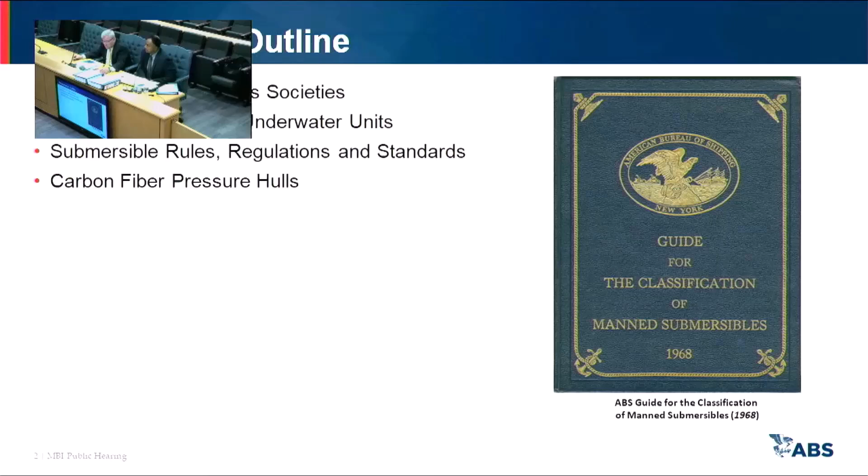I have a presentation which covers pressure hull requirements for passenger submersibles. This presentation basically looks at classification and class societies. We look at the ABS experience with underwater units, briefly look at the submersible rules, regulations, and standards, and also address a few questions on carbon fiber pressure hulls.

Okay, so what are class societies?

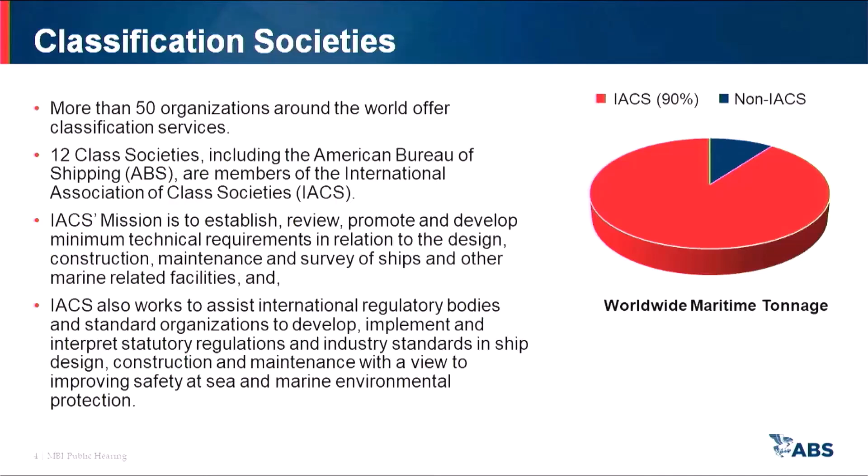Class societies are organizations that publish rules for the classification of ships, offshore facilities, and other marine vehicles such as submersibles. They conduct design review and surveys to check for compliance with the rules, and they issue class certificates and maintain a register or database of ships, offshore facilities, and other marine vehicles that the society has classed.

At present, there are more than 50 organizations around the world that offer classification services. Out of these 50, 12 class societies, including the American Bureau of Shipping, are members of the International Association of Class Societies, or IACS.

IACS's mission is to develop minimum technical requirements for the design, construction, maintenance, and survey of ships and marine-related facilities. IACS also works to assist international regulatory bodies such as the International Maritime Organization and standards organizations to develop and interpret statutory regulations and industry standards.

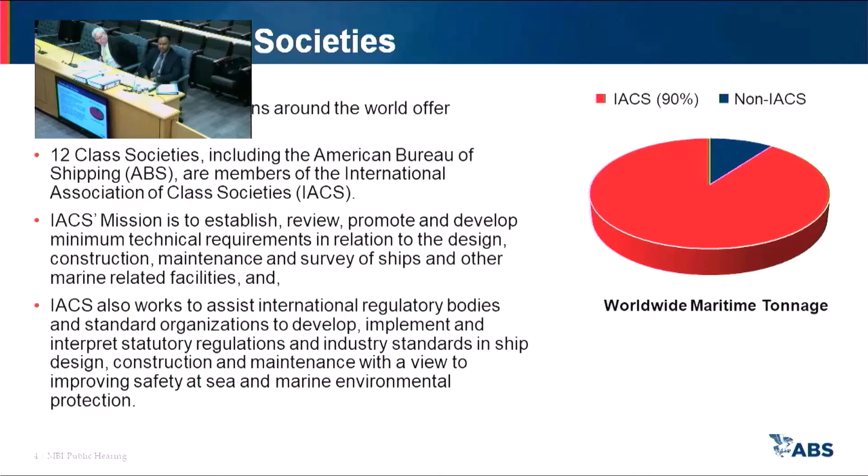IACS member societies are typically well-established class societies that are recognized by flag administrations around the world. At present, IACS member societies are responsible for classing around 90% of the world's maritime tonnage.

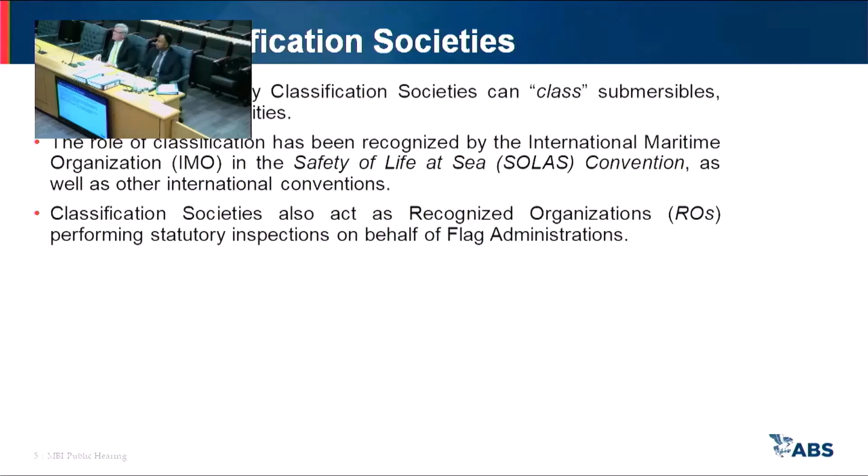In most countries, by law, only classification societies can class submersibles, ships, and offshore facilities. The role of classification has been recognized by the International Maritime Organization, or IMO, in the Safety of Life at Sea Convention, as well as other international conventions. Class societies act as recognized organizations, performing statutory inspections, as well as design review on behalf of flag administrations.

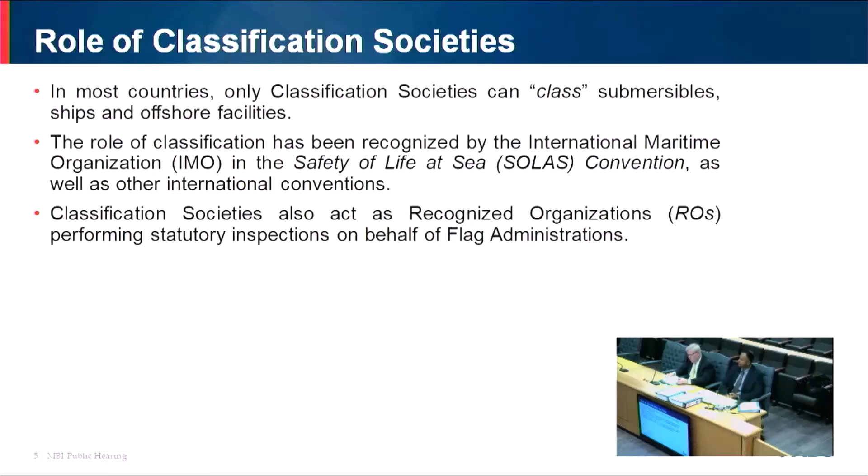The classification process consists of a number of steps which are described in Part 1A of the ABS Rules for Conditions of Classification. So what are these steps?

The first step involves the development of rules, guides, and other standards for ships, offshore facilities, and marine vehicles such as submersibles. The next step involves design review and surveys to check for compliance with the rules. Then classification of ships, offshore facilities, and submersibles occurs once compliance with the rules has been checked. Finally, a class certificate is issued, valid for 5 years and endorsed annually after conducting post-construction surveys. So how are the class society rules developed?

These rules are developed by class society engineers and surveyors with the assistance of industry experts. The rules are then reviewed and approved by committees that include industry experts, representatives of government organizations, shipbuilders, ship owners, operators, etc. This process ensures that the rules of the class societies are thorough, impartial, and practical to apply.

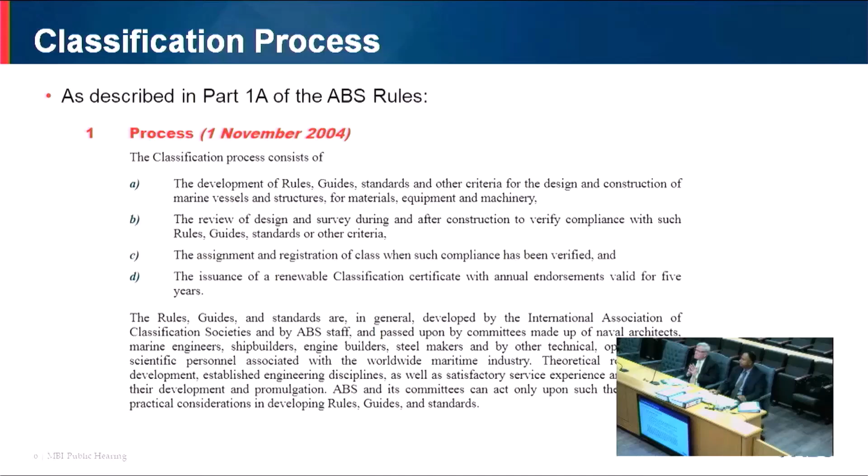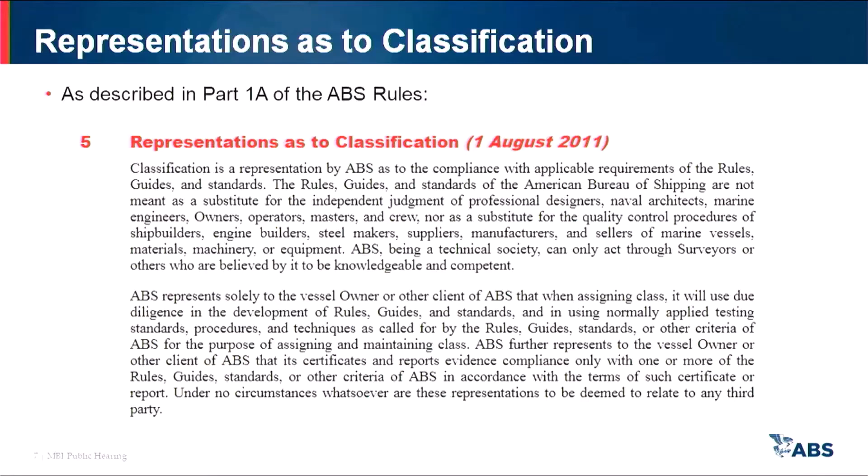Classification in essence means that vessels, offshore facilities, and submersibles are in compliance with the applicable rules. While classification is a process, the owner or operator also has responsibilities. First, they need to operate the submersible within its design or operational limits. All submersibles are designed for specific parameters, and if you exceed these parameters, you're likely to have an accident. So it's very important to operate the submersible within its design and operational limits.

They are also responsible for periodically inspecting and maintaining the submersible, for crewing the submersible with trained and competent personnel, and for following all applicable statutory regulations of the flag or coastal state administration. So all these are responsibilities of the owner and operator.

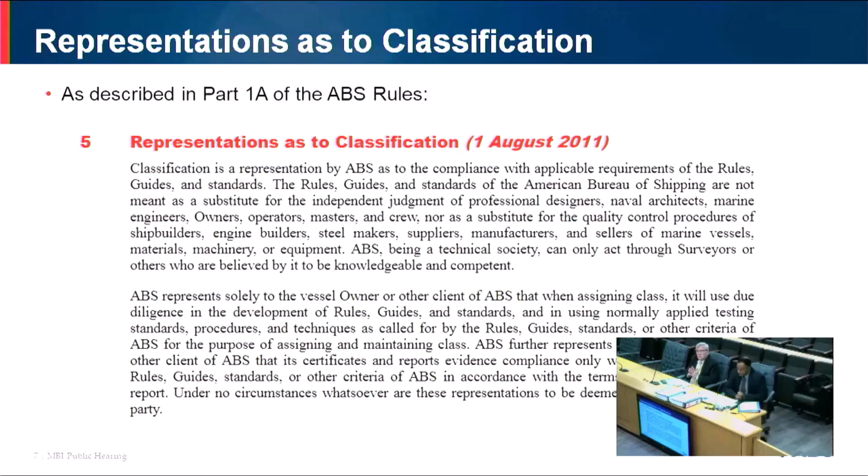The rules provide the minimum criteria for classification. However, owners and operators still need to use independent judgment when they operate the submersible, and safe operation as well as maintenance of the submersible is the sole responsibility of the owner and operator.

So what is the classification process for submersibles? This involves a number of steps. The first step is rule development, meaning we will develop, establish, and maintain recognized technical standards known as the rules. The rules provide the baseline for classification.

Once the rules are developed, the class society will conduct design review to check that the design of the submersible is in compliance with the rules. Then the class society will conduct material and equipment certification, which verifies that the submersible meets the rule requirements and that all materials and equipment are certified and meet the rule requirements.

Next we have new construction survey, which checks that the submersible is built as per the rules. Then we have surveys after construction, which check that the submersible is maintained in compliance with the rules throughout its life cycle. This is done through annual surveys conducted at 1-year intervals and special periodical surveys at 3-year intervals.

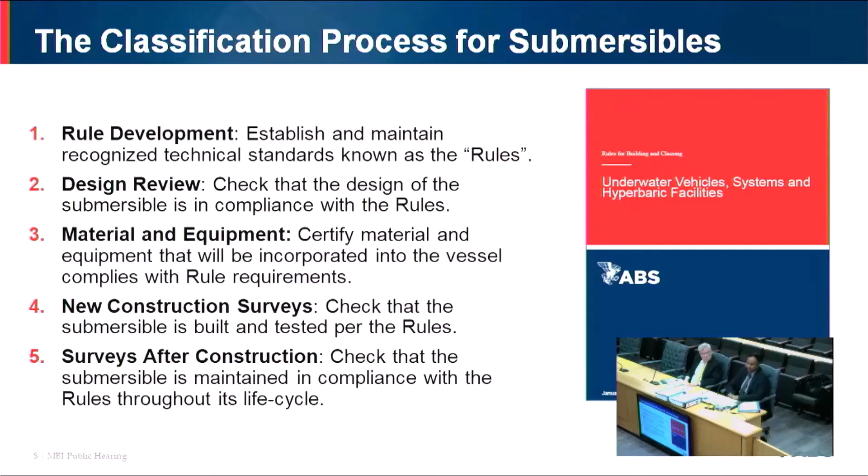This is a little different from surface vessels, which have their special periodical surveys at 5-year intervals. So why do we have a 3-year interval for underwater vehicles? This is because it comes from the IMO submersible guidelines, which require dry docking surveys at 36-month intervals. So this is the basic process for classification of submersibles.

So next we come to the ABS experience with underwater units.

Since the 1960s, ABS has classed around 100 submersibles worldwide. These include some of the first commercial submersibles developed in the 1960s and 70s, such as the Perry and Pisces submersibles. ABS has also classed some of the latest commercial submersible designs available in the market, including submersibles built by companies such as Triton Submarines and SEAmagine Hydrospace. Currently, ABS has around 30 submersibles in class.

Apart from submersibles, ABS also has 43 diving systems in class, including saturation, mixed gas, and air diving systems. We also have one submarine rescue handling system in class for the U.S. Navy, and one undersea habitat in class - the Aquarius habitat, located underwater off the Florida Keys. And then we have 3 hyperbaric facilities in class. So these are all underwater units currently in class with ABS.

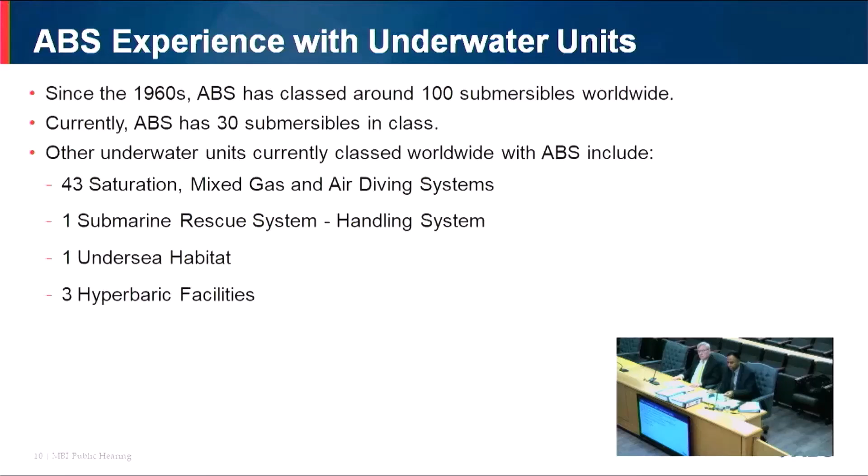When it comes to the OceanGate Titan Submersible, ABS had no involvement with this submersible. No request for class was submitted to ABS, and no design review or surveys were conducted by ABS.

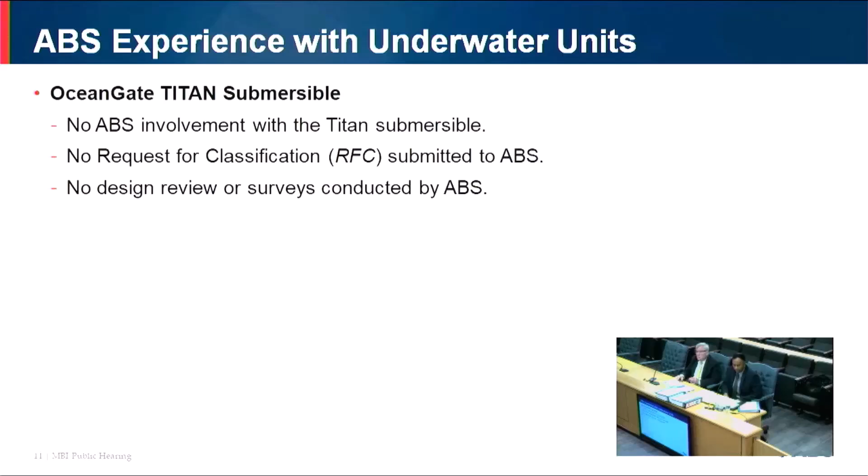The Coast Guard asked us about the Antipodes submersible. This was a submersible that was owned by OceanGate for a period of time, and it was then sold. This slide gives a brief history of the Antipodes submersible.

This submersible was built by Perry Submarine Builders out of Florida, and then major modifications were conducted by Marlin Submarines, a UK-based company. They removed the lockout compartment. The slide basically gives a brief history of this submersible.

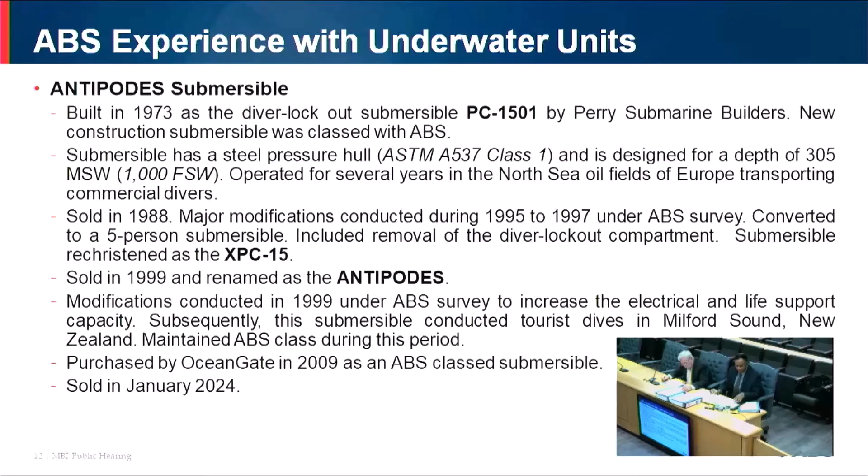The important point is this submersible has a traditional steel pressure hull, and it was designed for a depth of 305 meters seawater, or 1,000 feet seawater. The submersible maintained its classification during the time it was owned by OceanGate, and it is still classed with ABS. That's a brief summary of the Antipodes submersible.

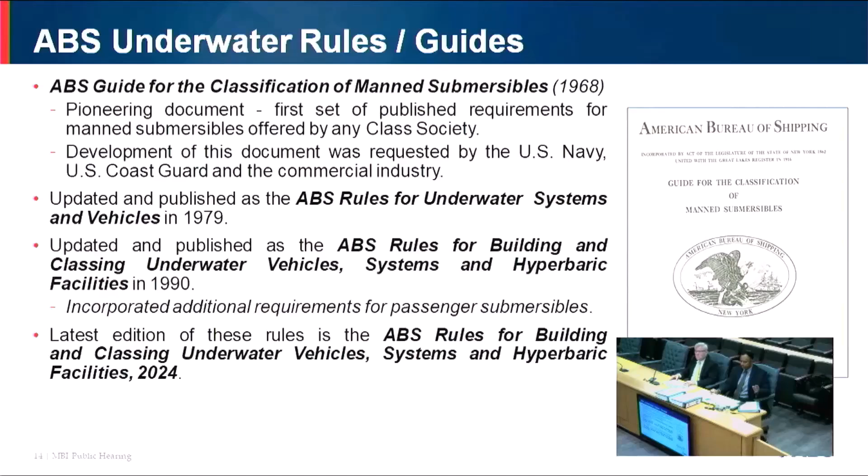Following the release of the 1968 guide, it was updated and published as the ABS Rules for Underwater Systems in 1979. It was again updated and published as the ABS Rules for Building and Classing Underwater Vehicles, Systems, and Hyperbaric Facilities in 1990, which incorporated additional requirements for passenger submersibles. The latest edition is the 2024 Underwater Rules, updated every year and posted on the ABS website, www.eagle.org.

Now we come to the materials. When it comes to submersible design, there are two sets of materials that are very tightly controlled: materials for the pressure hull and materials for life support systems. The pressure hull is a critical component, and it serves to protect the human occupants from the extremely high hydrostatic pressures present at depth. The pressure hull has absolutely no redundancy or backup.

If the pressure hull fails, you've effectively lost the submersible. So it is very important that the pressure hull be fabricated from robust materials that have a documented service history for external pressure applications. The ABS rules require pressure hull materials to be fabricated from approved material specifications, and the rules have a list of approved materials for pressure hulls.

These materials are listed on the screen, and they include steels, aluminum, titanium, and acrylic plastics for the windows. All of these materials have many years of documented service history and are considered to be well-established and robust materials. It's important to note here that carbon fiber composites are not approved materials for the pressure hull of submersibles, as per the ABS rules.

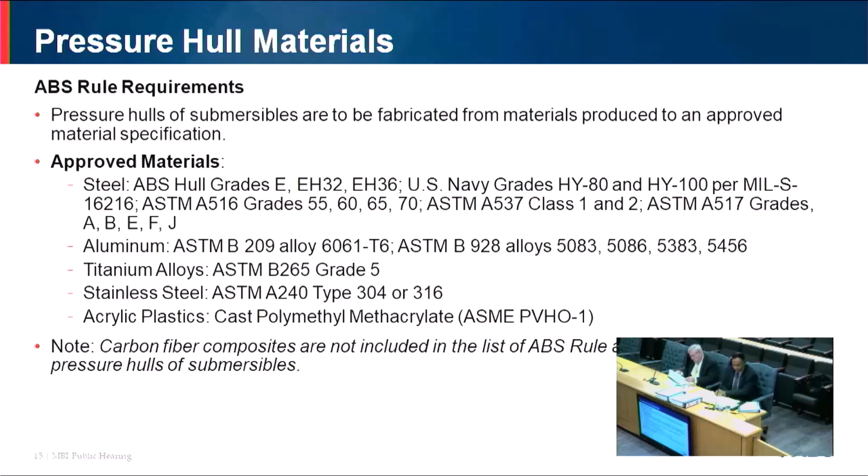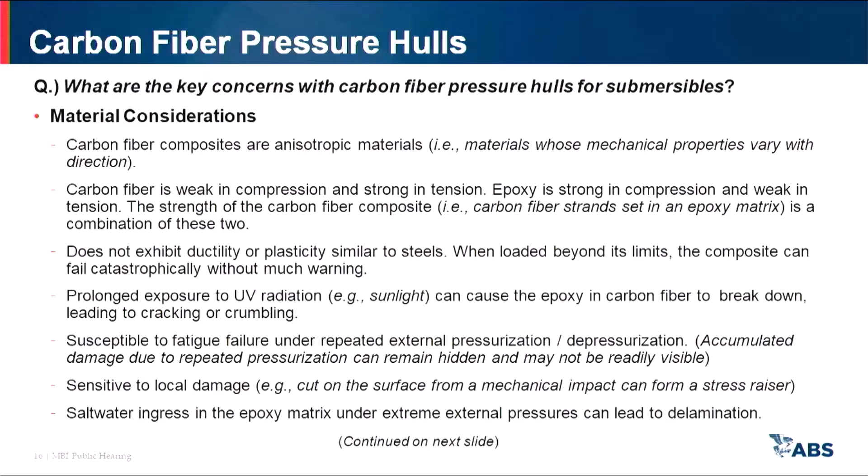So now we have a couple of questions on carbon fiber pressure hulls. So the first question that arises is, why do we need a carbon fiber composite pressure hull? What are we trying to achieve? Okay. So carbon fiber composites are high-strength, lightweight materials. Now, a pressure hull fabricated from carbon fiber composites would be much lighter than a hull made from traditional materials such as steel or titanium.

So with a lighter hull, what happens is you can reduce the amount of syntactic foam that needs to be carried on the submersible to maintain buoyancy. Then you don't need a crane or a launch and recovery system for launching and recovering the submersible while you're at sea. And since the hull is lightweight, you can increase the size of the hull and accommodate more passengers.

So typically what we have seen is anytime you go below a depth of 1,000 meters seawater or 3,280 feet seawater, the shape of the pressure hull is spherical. We have not seen cylindrical pressure hulls being used beyond a depth of 1,000 meters seawater. The reason is a spherical pressure hull is the best shape for resisting external pressure. The stresses are evenly distributed around the hull.

So if you take a spherical pressure hull versus a cylindrical pressure hull of the same thickness, when exposed to the same pressure, you will see that the hoop stress in a spherical pressure hull is half that of a cylindrical pressure hull. So if you see a cylindrical pressure hull being used beyond 1,000 meters, it is pretty unusual. So now, what are some of the key concerns with the carbon fiber composite pressure hulls?

So the first thing is carbon fiber composite pressure hulls are anisotropic. That is, the mechanical properties vary with direction. So the mechanical properties are strongest in the direction of the fibers. When the fibers are loaded in tension, that is when the carbon fiber composite is the strongest. But if you go in other directions, the composite is not so strong.

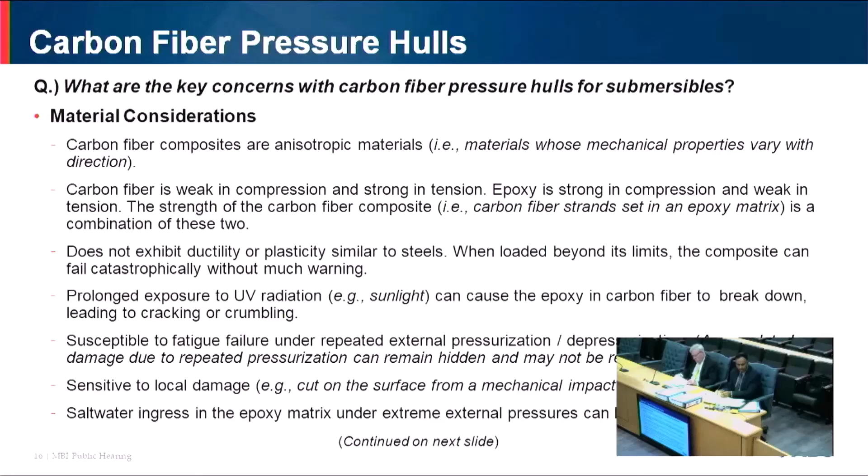So one of the processes used for fabricating carbon fiber composite pressure hulls is the filament winding process, in which the pressure hull is created by impregnating or coating the carbon fiber strands with epoxy and then winding them in a precise geometric fashion over a mandrel. So a mandrel is basically a tool in the shape of a cylinder. So on the cylinder, you wind the carbon fibers which are impregnated with epoxy, and then you cure that cylinder in an oven at 1 atmosphere or in an autoclave under pressure.

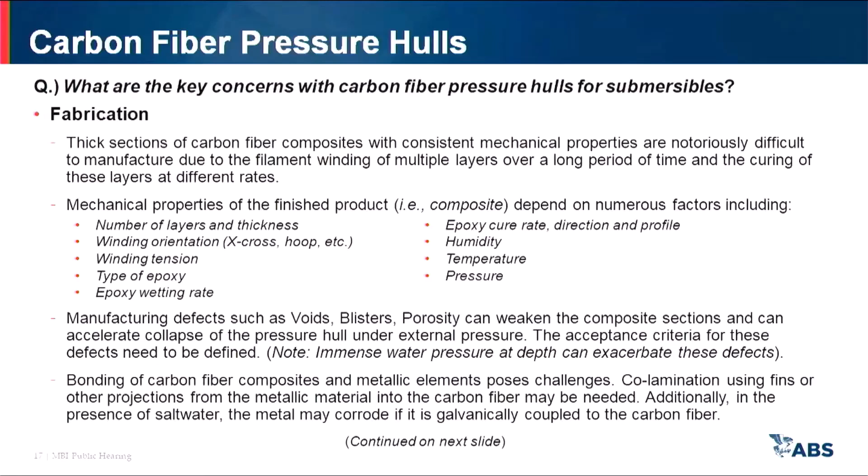So in a thick carbon fiber pressure hull, there may be several layers of carbon fiber composites, and these layers cure at different rates. So what you'll have is several layers with different mechanical properties since they were cured at different rates at different times. So manufacturing a thick section of carbon fiber composites with consistent mechanical properties throughout the thickness is difficult. So the mechanical properties of the finished carbon fiber pressure hull depend on a number of factors. These include the number of layers and the thickness of the carbon fiber composites. The more the number of layers and the greater the thickness, the more difficult it is to achieve a pressure hull with consistent mechanical properties throughout the thickness.

Another important consideration is the winding orientation. Now, a typical thick shell pressure hull is exposed to hoop stresses, radial stresses, as well as longitudinal stresses. Now, if your winding is hoop winding, that means if you wind the carbon fiber composites around the cylinder in a hoop fashion, that is only good for withstanding hoop stresses. It cannot withstand radial or longitudinal stresses. So to withstand radial or longitudinal stresses, you typically employ X cross winding. That means you wind it in an X pattern, and that is more effective in handling hoop as well as radial as well as longitudinal stresses.

Then the type of epoxy resin that is used for creating the composite has an impact on the strength of the pressure hull. So aerospace grade epoxies may not be suitable for high pressure underwater applications. Then there are other factors such as the epoxy wetting rate. That means how much epoxy can you coat on the carbon fiber strands. Then the epoxy curing rate. If you don't follow the correct curing profile, your mechanical strength may differ. Then humidity is another important consideration. High humidity during curing of the composite can negatively impact the mechanical properties. This is because moisture absorption in the resin can lead to delamination and reduced interfacial strength between the carbon fiber and resin, thus weakening the composite.

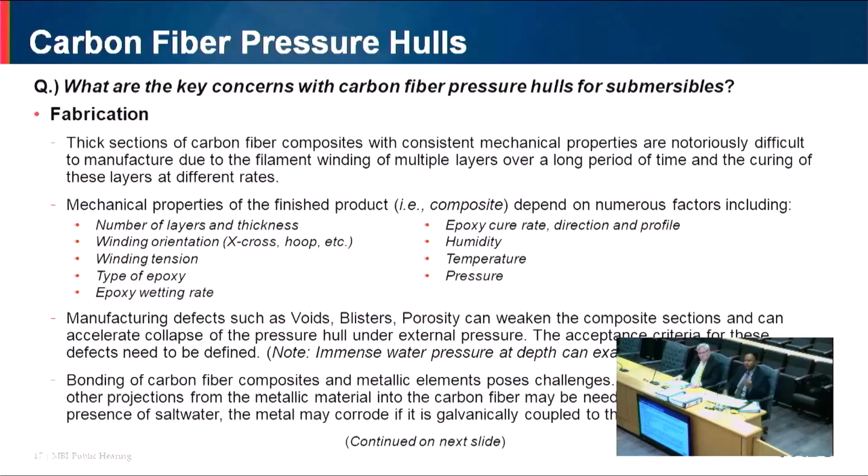Now, galvanic corrosion is an important consideration here because if the metal comes in contact with the carbon fiber strands in the presence of seawater, you can have galvanic corrosion. So this typically occurs in steels and aluminum, and that can cause corrosion of the metallic members. Okay. Next slide, please.

So now carbon fiber composites have a low modulus of elasticity, they have low shear strength, and they are brittle materials with low impact strength, okay? So they have very low resistance to impact loads, and the hull is susceptible to deformation under applied external loading. So typically lifting lugs and other attachments are not directly installed on carbon fiber composite pressure hulls because they cannot withstand localized loading, and they tend to deform under localized loading.

So then if you install penetrations on the carbon fiber composite pressure hull, that means you have to make openings in the pressure hull. That will weaken the pressure hull because the main load-bearing member in a composite are the carbon fiber strands. So if you cut the strands to make an opening, you're going to weaken the pressure hull. So reinforcement of the openings is very critical. And if you don't reinforce it, you can have stress risers in the vicinity of the opening, and that can lead to cracks and failure of the pressure hull, okay?

So then when you design your carbon fiber pressure hull, you also need to consider various failure modes, including delamination, debonding, fiber breakage, and matrix cracking, okay? So delamination basically means separation of the carbon fiber plies. The plies start separating. Then debonding basically means when the carbon fiber strands start coming out from the epoxy matrix, okay? So debonding is caused by failure of adhesion between the strands and the epoxy matrix. And then matrix cracking is basically characterized by cracks in the epoxy matrix, and this occurs due to fatigue of the material. Fiber breakage occurs when the carbon fiber strands will snap or break, okay?

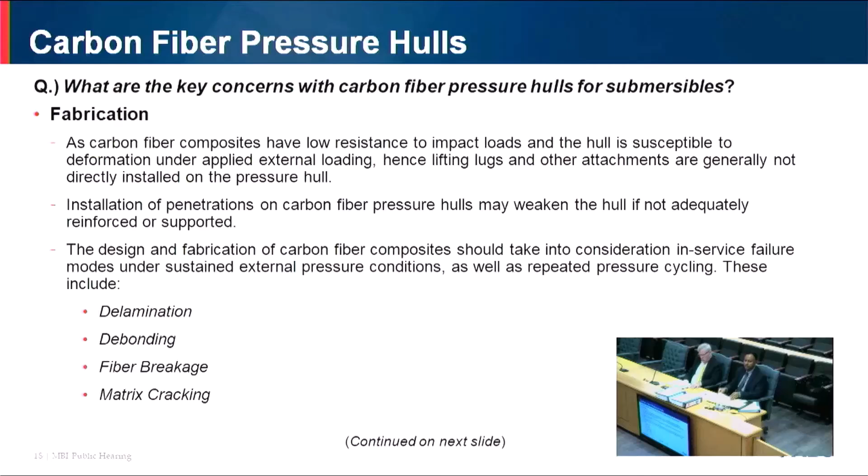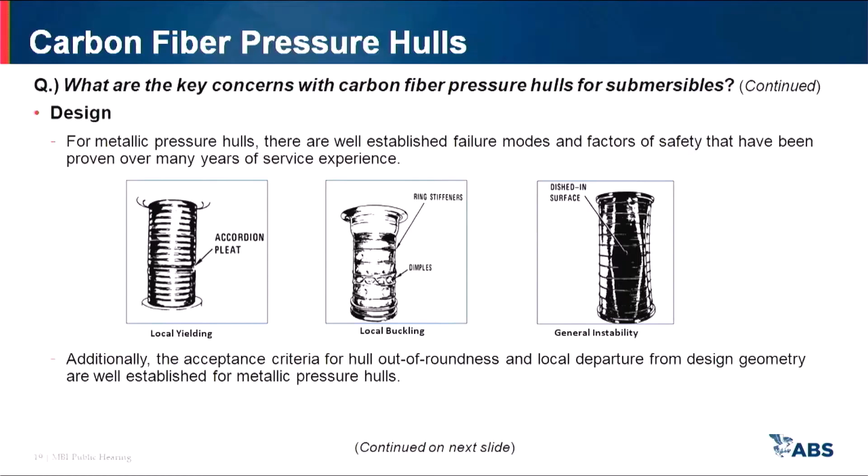So then when it comes to metallic pressure hulls, there are well-established failure modes and factors of safety that have been proven over many years of service experience, okay? So the figures on the screen show some of the typical failure modes for metallic pressure hulls. The first figure shows local yielding. So local yielding occurs when the section of the pressure hull between two adjacent stiffeners fails. Okay, you have yielding between two stiffeners, and then the hull will take the shape of an accordion pleat. So that is called local yielding, and the factor of safety for local yielding in the ABS underwater rules is 1.5.

Then you can have local buckling. Local buckling occurs when the section of the pressure hull between two stiffeners buckles. Okay, so you'll have dimples formed in the pressure hull, and that is known as local buckling or lobar buckling. And the factor of safety for this buckling in the ABS underwater rules is 1.25. And the third failure mode, which is the figure on the far right, is general instability or overall collapse of the shell and stiffener section, okay? And the factor of safety in the underwater rules for this failure mode is 2.0.

So all of these failure modes are well established, they have many years of service experience, and the factors of safety are well proven through service experience on many different submersibles.

Now, additionally, the rules also have a well-established acceptance criteria for hull out of roundness and local departure from design geometry. So when you have a pressure hull which is exposed to external pressure, it is very important to maintain roundness of the hull. So if the out of roundness of the hull goes beyond specifications, it can cause premature collapse of the hull.

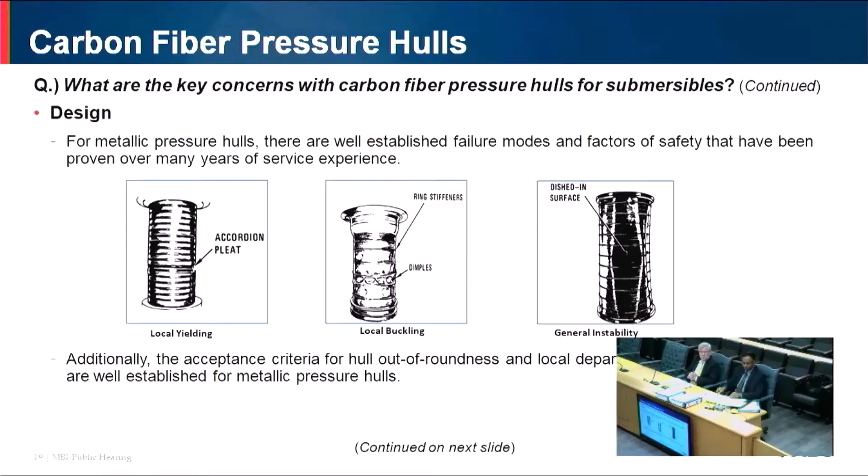Currently there are no recognized national or international standards for carbon fiber pressure hulls for human occupancy. The ASME Boiler and Pressure Vessel Code has Section 10, which addresses fiber reinforced plastic pressure vessels. But if you look at the scope of Section 10, it states that pressure vessels of human occupancy are not covered under this code. We had a look through this code - it addresses pressure vessels that are used for surface applications. It really does not address pressure vessels that are used for deep sea diving applications.

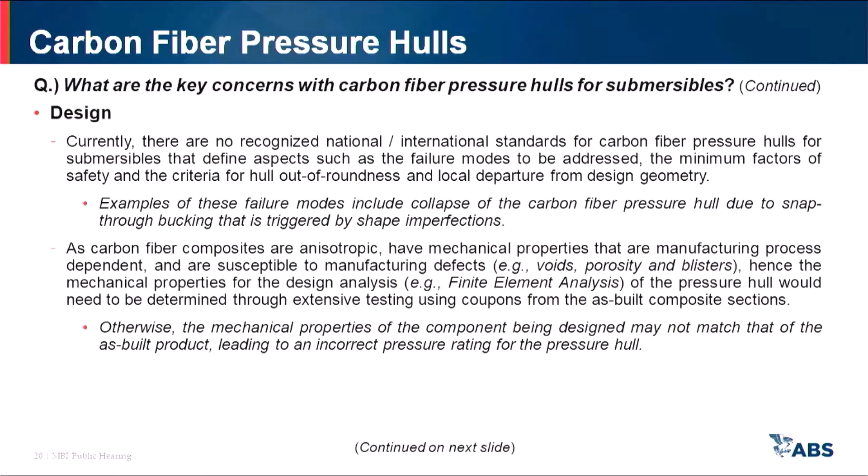We had a look at the testing requirements. Many of the testing requirements are geared towards internally pressurized pressure vessels. We didn't see any specific testing requirements for externally pressurized pressure vessels. So these are some of the shortcomings of Section 10, and this section is not applicable to manned pressure hulls.

Nevertheless, it has a lot of useful information. It has acceptance criteria for voids, delamination, cracking, etc. The important thing is this code states that for a new construction pressure hull, no delamination and no cracking in the matrix is permissible. So if you have a new hull with delamination or cracks, it is not acceptable as per this code.

When it comes to carbon fiber composite pressure hulls, the different failure modes, the factors of safety, as well as the other acceptance criteria is not really defined in international standards, as well as class society rules. So one of the very important failure modes for thick shell carbon fiber composite sections under external pressure is snap-through buckling. Snap-through buckling is an effect that has been observed in subsea pipelines made of glass fiber reinforced plastics.

This buckling causes sudden and catastrophic failure of the pressure hull, and it is thought to be triggered by shape imperfections. For example, if there is out of roundness, that can trigger this buckling.

Snap-through buckling is different from traditional buckling, which is caused by progressive overpressurization of the pressure hull beyond its design depth. When snap-through buckling occurs, it causes instantaneous delamination of the pressure hull and instantaneous collapse, which can occur in less than a millisecond. So if you have sensors for real-time monitoring, it will not pick up any signs of this failure before it occurs. Snap-through buckling is a phenomenon that is not yet well understood.

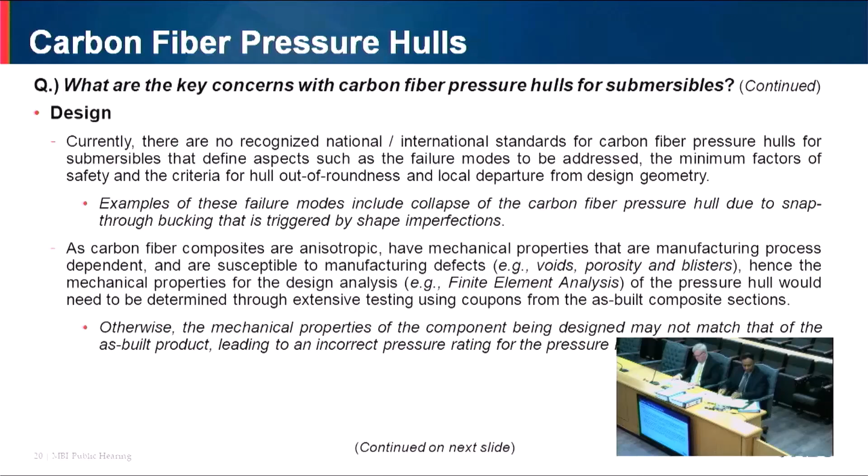So next we come to non-destructive inspection of thick carbon fiber sections. If you have a very thick carbon fiber section, for example a 5-inch thick section, ultrasonic examination may not be suitable because of lack of penetration of the ultrasonic waves and lack of reflection. So using UT, you may not be able to evaluate a thick carbon fiber composite section.

So for thick carbon fiber composite sections, you will use non-destructive techniques such as X-ray computed tomography, or you can use active thermography. With X-ray computed tomography, basically you have an X-ray machine that goes around the circumference of the pressure hull, and you get images in slices. All these images are combined together using software, and you get a 3D image of the hull. Then you have an in-depth look at what is going on inside the hull.

So this inspection basically requires you to strip down the pressure hull. If you have a pressure hull that is in service, and now you need to do a non-destructive examination, you need to remove all the equipment, or all the outfittings on the pressure hull. Now if you do not have this equipment at the facility where you're maintaining the submersible, then you need to ship the submersible hull to another facility where they have this specialized equipment.

Now, after doing the NDI, if repairs are required, you may need to repair the pressure hull, and then ship it back. So all this is an expensive and a long process, and it may not work practically for a submersible that is in operation, because you need to take it out of operation for many months at a time. So these are some of the challenges that you will face if you use a carbon fiber composite pressure hull.

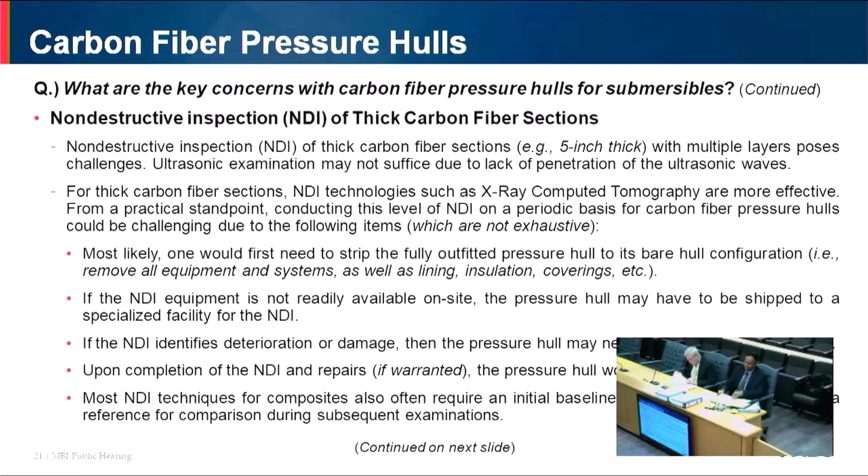So for carbon fiber composite pressure hulls, it is very important to verify that no deformation is taking place, no degradation is taking place, or no flaw development is taking place that may weaken the pressure hull. So this needs to be done periodically over the service life of the pressure hull.

Now, the post-construction inspection and testing criteria for carbon fiber pressure hulls are currently not addressed in recognized international or national standards. As a minimum, they should address non-destructive examination criteria. So what kind of non-destructive examination is required? What is the periodicity, and what is the acceptance and rejection criteria for this examination?

Then what are the dimensional measurement criteria for out of roundness and local departure from design geometry? So how much out of roundness is permissible? This is currently, for a carbon fiber composite pressure hull, not addressed in international standards. And then what are the test dive requirements periodically for carbon fiber pressure hulls? So all of these are not addressed currently and they need to be addressed.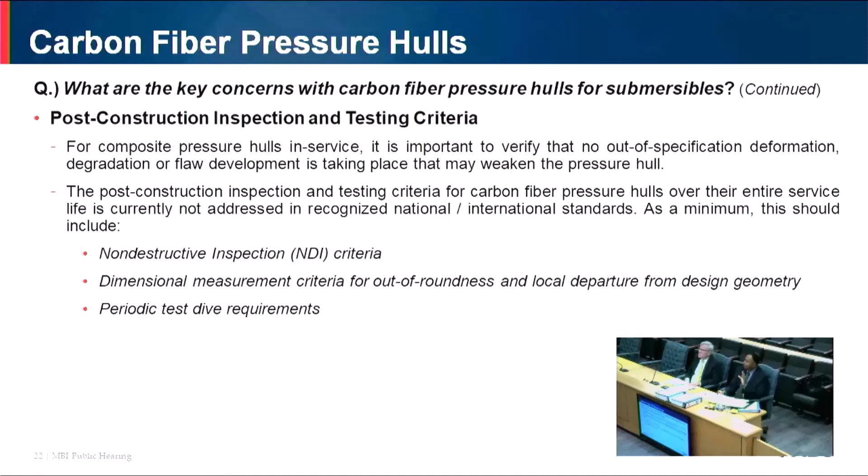So then the question comes up, do existing class society rules, statutory regulations, or industry standards address carbon fiber pressure hulls for submersibles? Under the ABS underwater rules, carbon fiber pressure hulls are not acceptable materials for submersibles. Now, to the best of our knowledge, the requirements of other IACS member class societies, as well as existing industry standards or statutory regulations, do not have specific requirements for carbon fiber composite pressure hulls.

Now, we are aware that a number of ASME PVHO cases have been developed for the use of non-metallic materials for pressure vessels for human occupancy. So what is an ASME PVHO case?

Now, if a designer or builder wants to deviate from the published requirements of the ASME safety standard, then they develop something known as an ASME case. This ASME case is then submitted to the ASME PVHO Standards Committee, and the Standards Committee will review the case and then they will approve it.

Once the case is approved, they place it on the ASME website. So all the published cases are put up on the ASME website, and anyone can use a published case. So ASME has a mechanism by which, if you want to deviate from the published requirements, you develop a case, and that is published and put on their website. This is similar to the code cases that are developed for the ASME boiler and pressure vessel code.

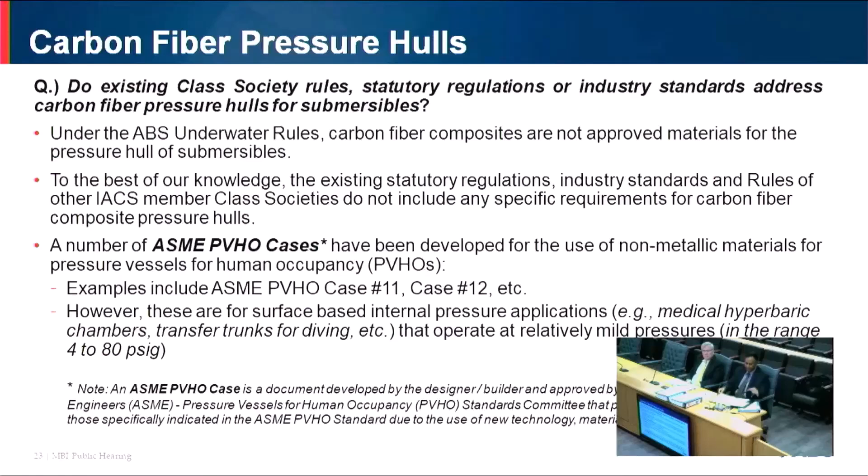So all of these are for internal pressure applications, and they are for very mild pressures as compared to the pressure at a depth of 4,000 meters seawater.

So then the question comes up: do class society rules allow you to use alternative requirements or equivalent standards for carbon fiber PVHOs? While the ABS rules do have provisions for alternative arrangements and novel concepts, in the many decades that we have been classing submersibles, these alternatives have not been used for carbon fiber pressure hulls.

Now, if you have non-standard designs or materials, there is a mechanism in the ASME PVHO standard by which you can get approval. If you look at the ASME PVHO standard, non-mandatory Appendix D has guidelines for developing a PVHO case for the use of non-standard materials or non-standard designs.

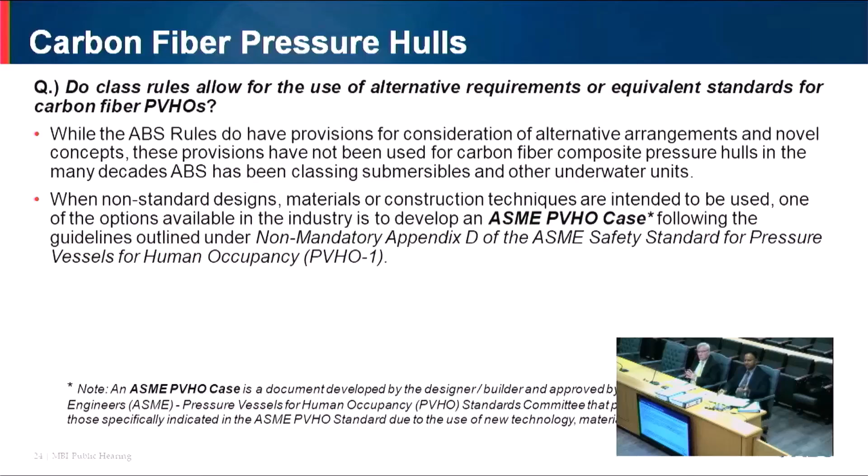This slide basically gives a brief overview of non-mandatory Appendix D in the ASME PVHO 1 standard. These are basically guidelines for qualifying non-standard designs and non-standard materials. As the first step, detailed design information on the proposed materials along with the detailed design analysis, which consider all applicable loads and environmental conditions, needs to be developed.

Thereafter, you have to conduct prototype testing. This testing involves proof pressure testing. For this, 3 full-scale pressure hulls are tested to 6 times maximum allowable working pressure, or MAWP, without failure. So this is basically a factor of safety test. You test the hull to 6 times its design pressure, and if it does not fail, that qualifies the design.

The next testing is creep testing. So what is creep? Creep basically means under sustained hydrostatic loading, does the pressure hull deform? For creep testing, you use model or full-scale pressure hulls, and they are subject to 10,000 hours of sustained pressurization without failure. 10,000 hours basically means 1 year and 1.5 months. So you pressurize the hull and maintain the pressure for that duration, and then you check if the hull has deformed or failed by creep.

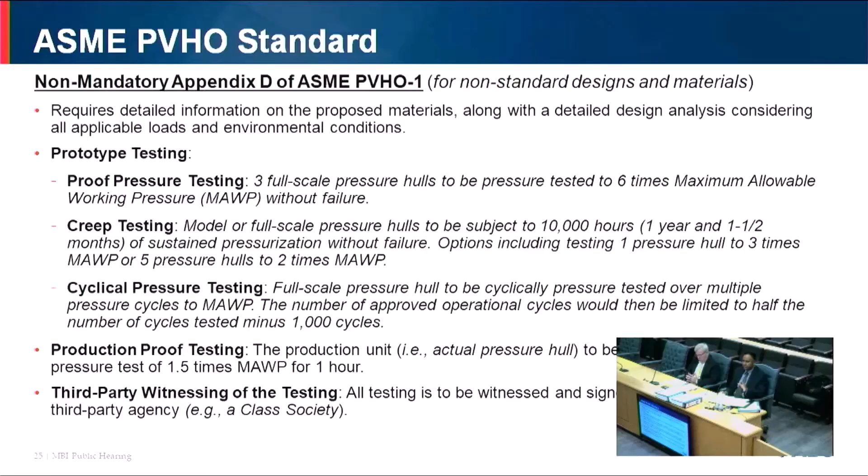So these guidelines provide very clear requirements for non-standard designs and materials. You can follow these guidelines anytime you have non-standard designs or materials. So there is a mechanism in the industry for qualifying non-standard designs and materials.

So then when it comes to hydrostatic pressure testing requirements for pressure hulls, what are the ABS rule requirements? Now these rule requirements are for metallic pressure hulls. The ABS rules require your pressure hull to be hydrostatically pressure tested to 1.25 times the design depth for 2 cycles. And when you do this pressure testing, you have to strain gauge the pressure hull.

Strain gauges are to be fitted in way of hard spots and discontinuities. A hard spot is a spot where the hardness is slightly different from the other sections of the hull. A discontinuity could be a sudden change in the geometry, loading, or material of the hull. So all of these spots would be strain gauged.

And then the strain gauge measurements are recorded after shakedown effects have ceased. So the question comes, what is shakedown?

In a new construction pressure hull, you will notice localized areas of high stresses on the hull. When you pressure cycle the hull above its design pressure, these localized areas of high stress start deforming, so you'll have localized deformation and then strain hardening occurs. Once the strain hardening occurs, no further plastic deformation of the hull occurs—all the deformation is in the elastic region. That is when the shakedown effects cease.

So what happens if you pressure test the hull and start recording the strain gauge measurements before shakedown has ceased? You will note that the strain gauge measurements on the first and second cycles do not match, because shakedown is still taking place. After shakedown has ceased, the readings on the strain gauge on the first and second cycle will match.

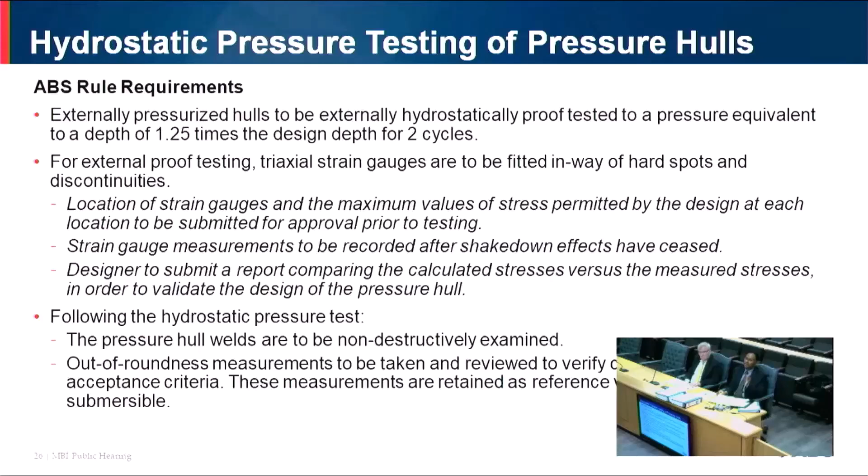So 5 years down the road, if you want to check what were my original readings versus my readings now, these are the reference readings that you will use throughout the life of the submersible. So it is very important to have a reference set of readings which you will use for the life of the submersible.

So then we come to the ABS rule requirements for test dive of new construction submersibles. After the pressure hull is built and fully outfitted, we conduct a test dive. Before passengers get on the submersible, you have to do a test dive in the presence of the ABS surveyor. So how do you do this test dive?

You start diving and increase your depth at 20% increments. You first dive to 20% of your design depth, stop, and start internally inspecting all your welds, all your hatches, you inspect your windows, and check your pressure boundary valves to make sure there are no leakages. If everything is good, then you continue the test dive for another 20%. In this manner, you keep going down till you reach your test depth.

Once you reach your test depth, you functionally test all your systems—your life support systems, your electrical systems, and other essential systems. So this is a test dive. This qualifies the submersible for diving at that particular depth.

Sometimes when you go for doing a test dive, the depth of the water may not be equal to your design depth. Your design depth may be deeper than the depth at which you tested the submersible. So the depth at which you tested the submersible is known as the rated depth. When we class a submersible, we will class it for the rated depth. Later on, if you want to increase the rated depth, you can do another test dive beyond the rated depth, but not exceeding your design depth. So there are two depths that are very important: design depth and rated depth.

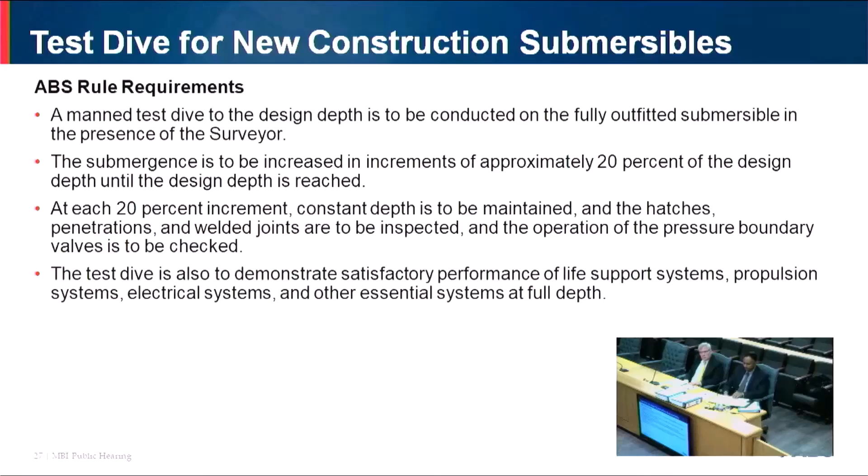So then we come to post-construction surveys. During the annual surveys, this is basically a visual examination of the pressure hull. The surveyor will go and inspect the pressure hull, the hatches, the sealing surfaces, penetrations, the welded joints, viewports, foundations, and the shut-off valves on the pressure hull. This is a visual examination to make sure there is no degradation, no leakage, etc.

This is done every 1 year. Then the special periodical surveys are conducted at 3-year intervals. During this survey, we have enhanced examination of the pressure hull, which requires removal of protective coatings as well as thermal insulation in selected locations. If you have highly stressed parts such as the lifting lug welds, they are non-destructively

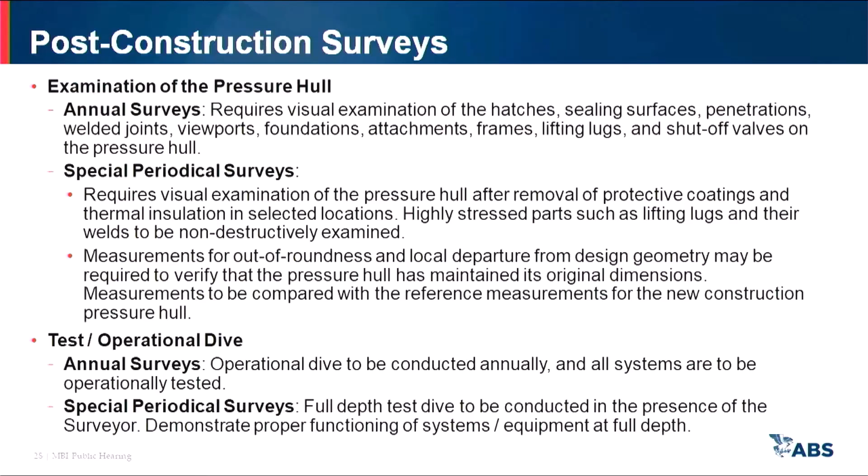examined using surface NDT techniques such as dye penetrant testing, eddy current testing, etc. If the surveyor suspects there is deformation of the hull or damage to the hull, then the surveyor may require out-of-roundness measurements to be taken for the hull. These would be compared with the reference measurements as well as the acceptance criteria specified in the rules. If you exceed the acceptance criteria in the rules, then the pressure hull is rejected. You have to repair the pressure hull, bring it back in spec. Otherwise, you cannot dive.

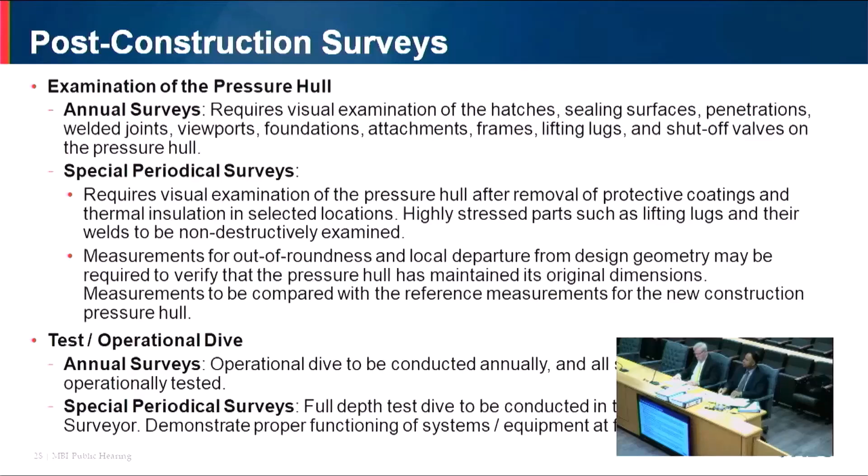So then we also require a test or operational dive. During the annual surveys, we require an operational dive to be conducted every year. During our special periodic surveys, we require a full depth test dive to be conducted in the presence of the surveyor. This dive is to demonstrate proper functioning of the systems and equipment at full depth.

So then we come to the IMO submersible guidelines. These guidelines were developed by the International Maritime Organization, or IMO, back in 2001. The intent was to provide an international standard that could be used by flag administrations around the world. Compliance with these guidelines is voluntary since the IMO SOLAS Convention does not mandate that you have to comply with these guidelines. Unless the flag administrations require compliance, designers or operators may not comply with these guidelines.

These guidelines require the pressure hull, materials, fabrication and testing to comply with the requirements of a recognized organization to the satisfaction of the administration. A recognized organization is typically a class society. So if you want to comply with the IMO submersible guidelines, it means that your pressure hull needs to meet the requirements of a class society.

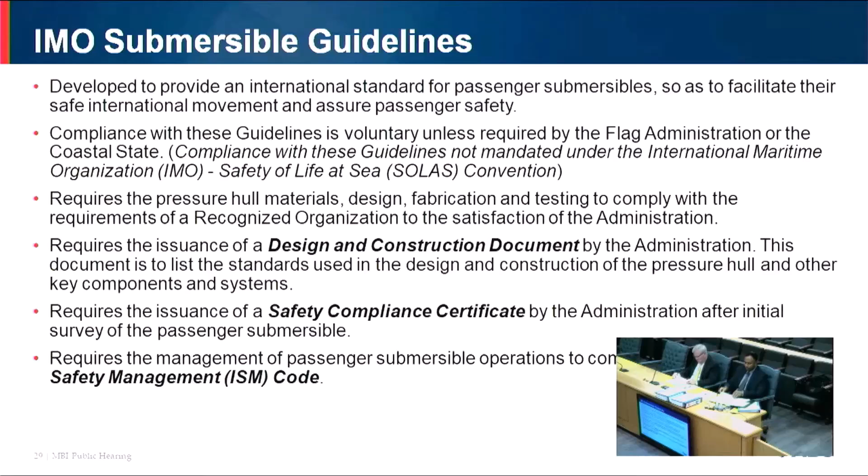It also requires the issuance of a design and construction document by the administration, which lists the design and construction standards for the submersible. It also requires the administration to issue a safety compliance certificate after the initial surveys of the submersible are conducted. Typically the design review and surveys would be conducted by a recognized organization, such as a class society, on behalf of the flag administration. This submersible guidelines also require the management of passenger submersible operations to comply with the International Safety Management Code, or ISM code. So that's a brief overview of the IMO submersible guidelines.

So then we come to the U.S. Coast Guard Navigation and Vessel Inspection Circular, NVIC 5-93. This provides guidance for the certification of passenger submersibles. These guidelines were developed back in 1987 when the Atlantis passenger submersibles were being classed. The Coast Guard worked closely with Atlantis, and these guidelines were developed, tailored to the Atlantis submersibles.

Currently, if you're under 100 gross tons, Subchapter T of 46 CFR has requirements for passenger vessels under 100 gross tons, but these apply to surface vessels and typically do not apply to submersibles. So to develop equivalency to these requirements, this NVIC was developed and published back in 1993. This NVIC applies to submersibles carrying one or more passengers for hire, as per the 1993 Passenger Vessel Safety Act.

This requires the pressure hull to meet the ASME PVHO standard or the ABS underwater rules. This NVIC applies to U.S. flag submersibles or submersibles operating in U.S. jurisdiction, so it does not apply to non-U.S. flag submersibles or submersibles operating in international waters. That's a brief overview of this NVIC, and that's all I have in the slides.